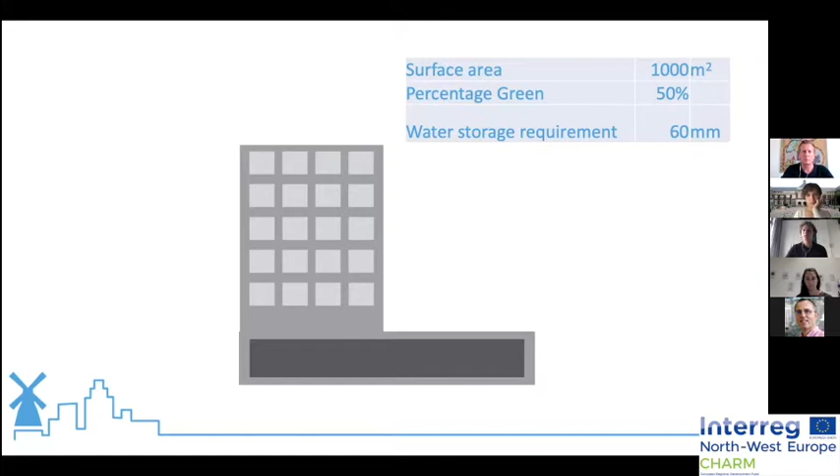Here we see a building, could be a housing corporation building with a surface area of 1,000 square meters. And there's a requirement for green of about 50% and a water storage requirement of 60 millimeters. 60 millimeters is like a really heavy shower. And you should be able to capture that on your own terrain.

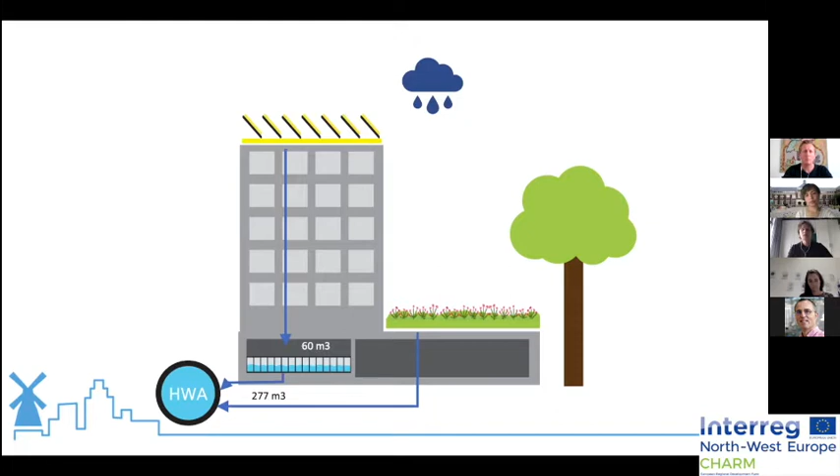So conventionally, we like to use the flat surface for solar panels, as this is a smart investment. Part of it can be a rooftop. But you have to create something to buffer your rainwater, to store it. This can be done in a basement, and you release the water at a moment when there's no pressure on the sewer system. But then there are longer periods of drought, and still you need to irrigate your green, and then you have to make use of drinking water, which is actually a waste.

So that's when the Dutch fly in with a new technology, and we invented the polder roof. How does it work? Of course, we put it on a flat roof, and the roof should be waterproof. It should be able to maintain the water for a longer period of time. Then we have the buffer crates. Here we can buffer like 70 millimeters of water, and on top of that you can put your green roof or a roof garden or your solar panels as you like.

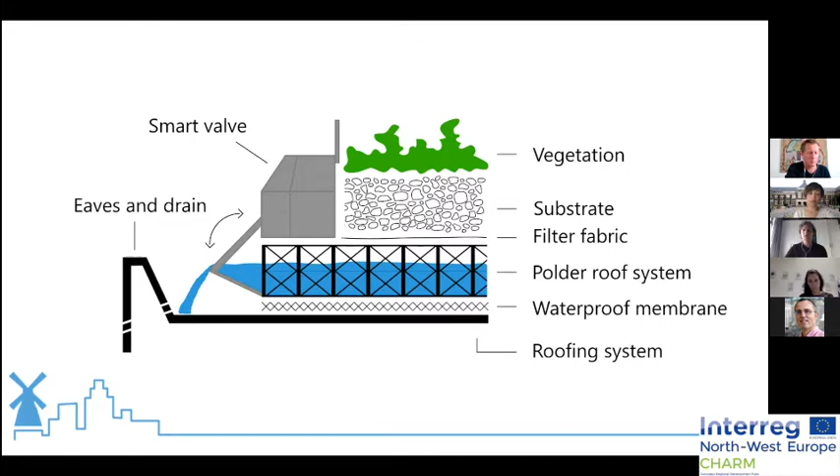But what is smart about this polder roof is actually the smart valve, which anticipates the weather forecast, which I will show you in a minute. Here the smart valve is connected to a dashboard, so from your office or from your desktop you're able to have a look at what's happening on your roof, able to manage the water level as well, or you put it on automation mode.

Back to the example, so if you put a polder roof, you're able to buffer the 60 millimeters actually on top of your roof, and in periods of drought you can use the water to garden your rooftop or irrigate your garden.

And then it anticipates on the weather forecast. So when there's still water in your polder roof, but there is rain forecasted in 2 hours, then you're able to release your water at a moment when there's no pressure on the sewer system, and you create new buffer capacity on your polder roof to capture this rainfall.

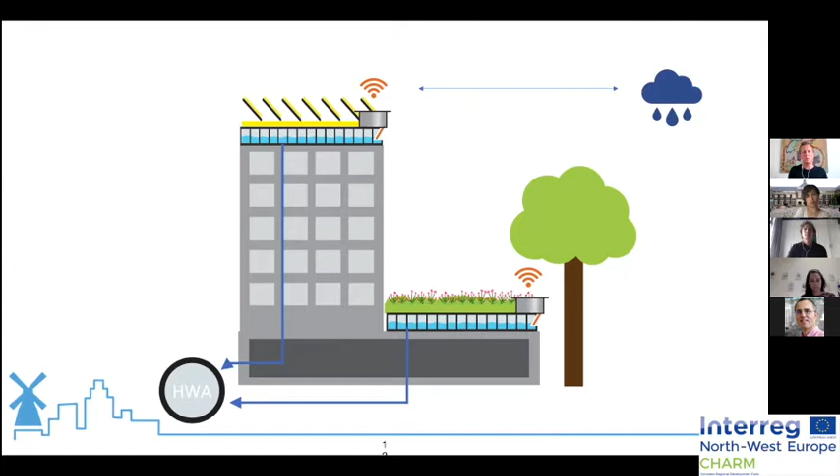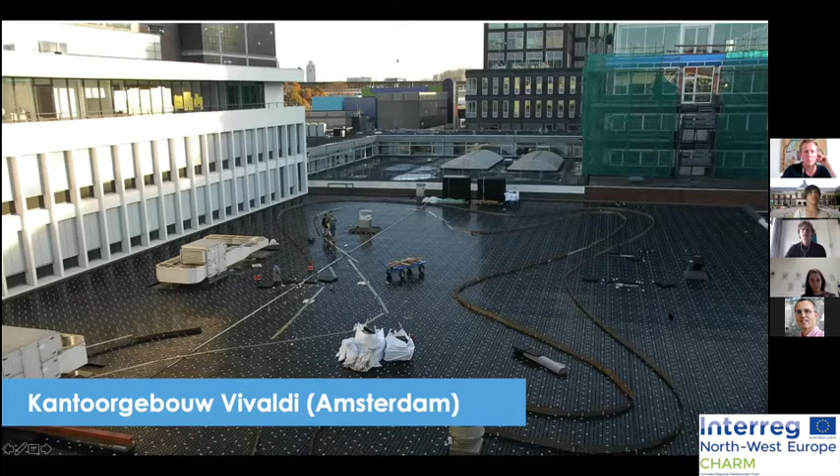I'll show you some pictures. This is a picture of an office building in Amsterdam. Here it's still under construction. So here the black is the buffer crates where you retain your water up to 70 millimeters. And here it's finished up in a really nice roof garden.

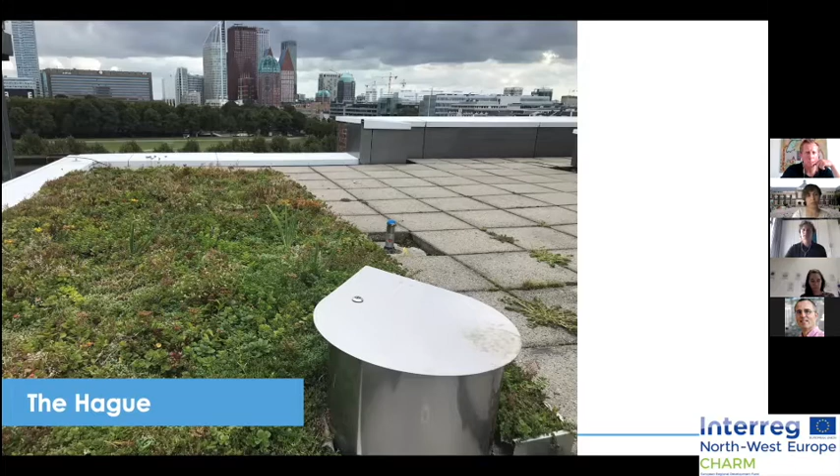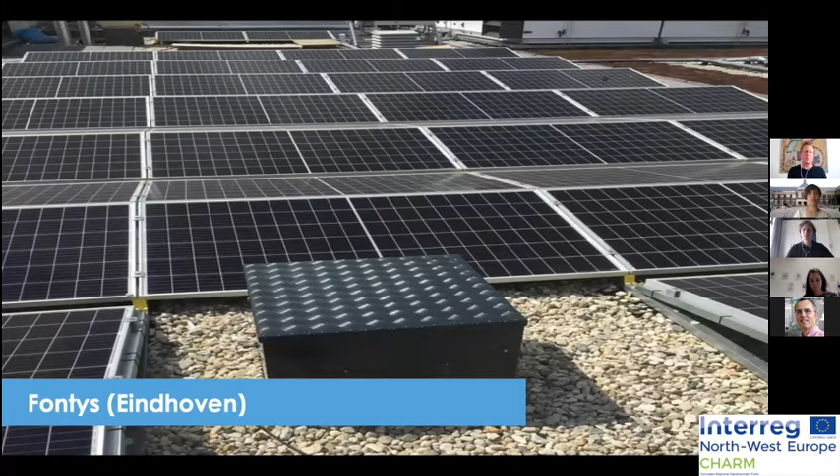I show you this picture in The Hague as we have a closer look at the smart valve. We call it actually the smart drop due to its shape. This is full of sensors and regulates the water level. Another feature, we combine the polder roof with solar panels. Research has shown that due to the cooling effect, you actually have an increase of 6% in the energy performance of your solar panels, which is of course a benefit.

Back to the city, if we talk about climate adaptation, the question is, what can we do in the city, and especially where? As 5% of the city consists of water systems, 45% is public space, but 50% is private space. So it's really important to get these private parties involved in your climate adaptation strategy. And therefore it's also important to get the social housing corporations involved, as they, in most cases, have property in the city for about 30 or 40%

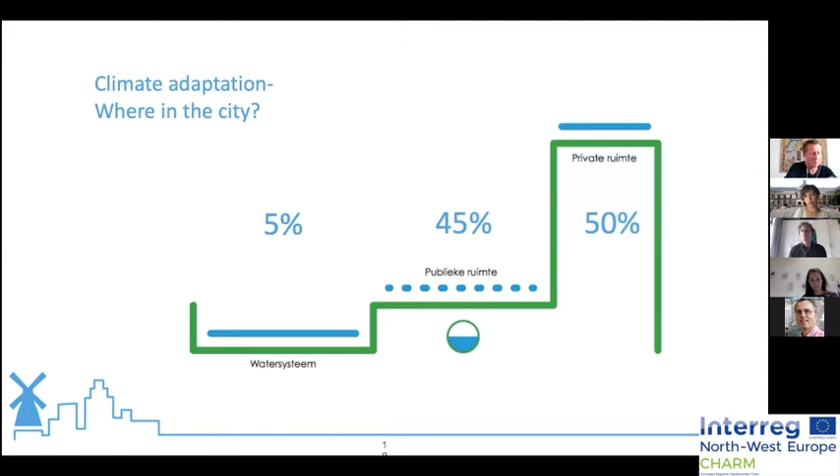even. So what we do in Amsterdam at the moment is called the RESILIO project. On the website you'll find more information, but we do research there with different universities. But more important, we work together with social housing corporations to implement 10,000 square meters of polder roofs. And with this project, the idea is to really be an example for other cities in Europe as well.

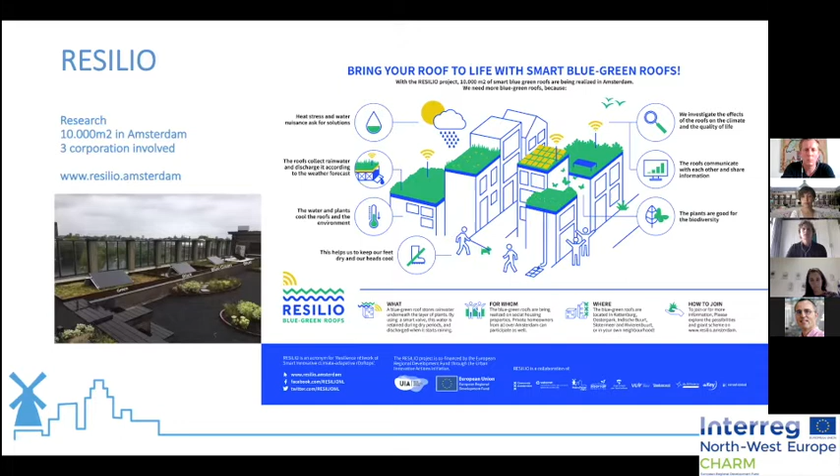So what you can say as a housing corporation towards the municipality is that, okay, we all face problems with regard to climate change, but we as a social housing corporation do have part of the solution, which is we have a lot of space which can be used, but we need your support to come along together with us and make these climate adaptation measures all together. So I think that's in a nutshell what I wanted to share.

If there's time left at the end, I can show you maybe a small video of the cooling effect, but for now, I think I'm just in time or even over time a little bit. I think we have a couple more minutes for him. If the video is not too long, we can take it. It's 30 seconds.

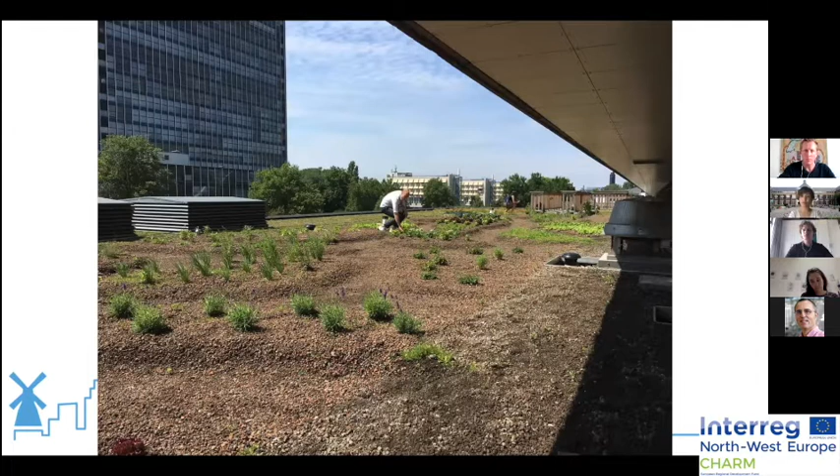Let's go for it. Okay, this is a polder roof on the TU Delft University campus, where we do urban farming. And this same roof you will see in the next video, which is an infrared video, which shows temperature differences of two similar roofs, but one is with a polder roof and the other one without.

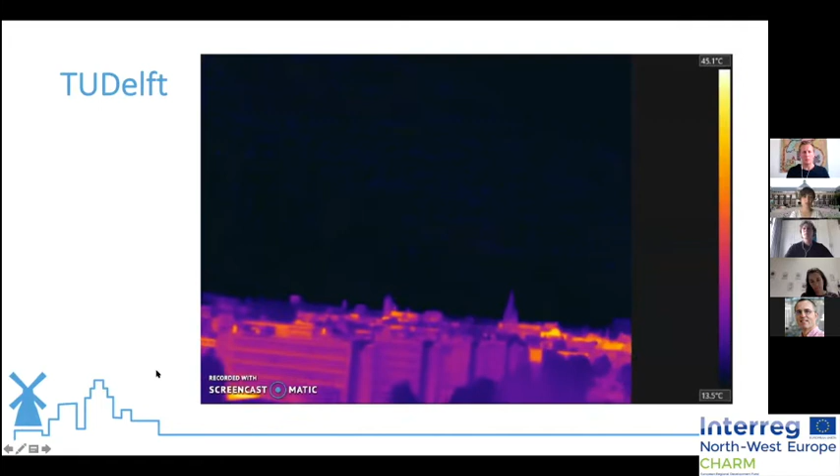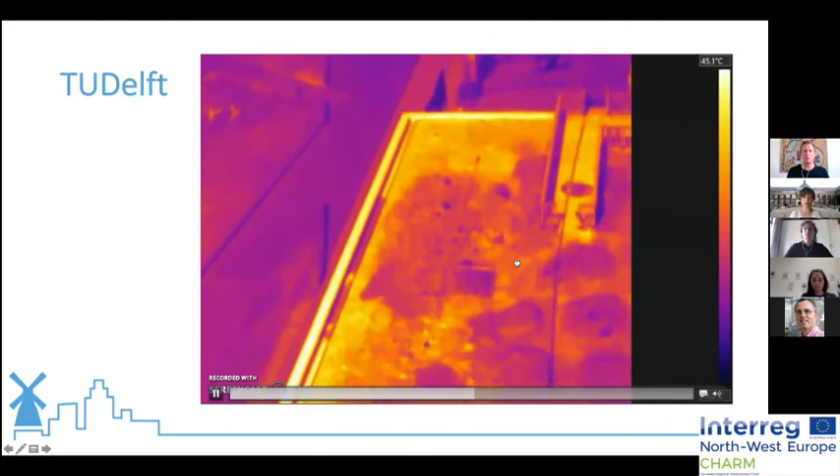So the camera in a minute goes down, and you see here, when it's really yellowish, it's pretty hot. So this roof is about 45 degrees. Wow. And the same kind of roof that we saw just now is the polder roof, which is far less hot, so to speak. So this shows pretty nicely the cooling effect of a polder roof due to its evaporation.

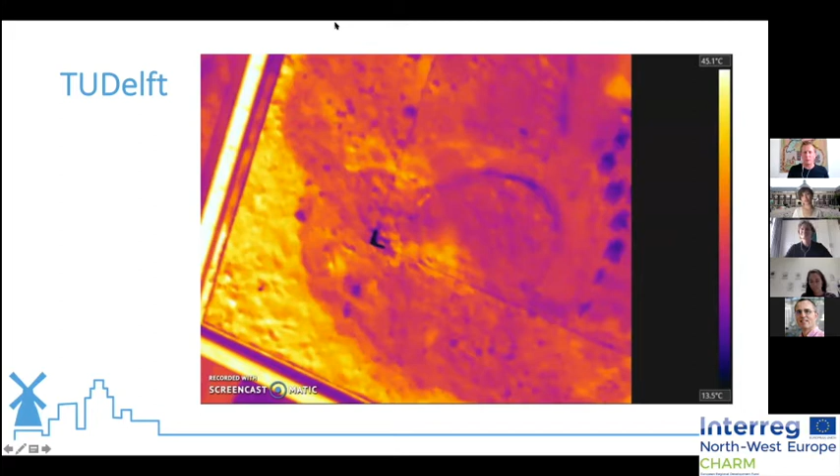Oh, that's amazing. That was also one of my questions. Is it a proven system? But you proved it already by the video. Yeah, well, with regard to the cooling effect, this is, I think, a nice proof.

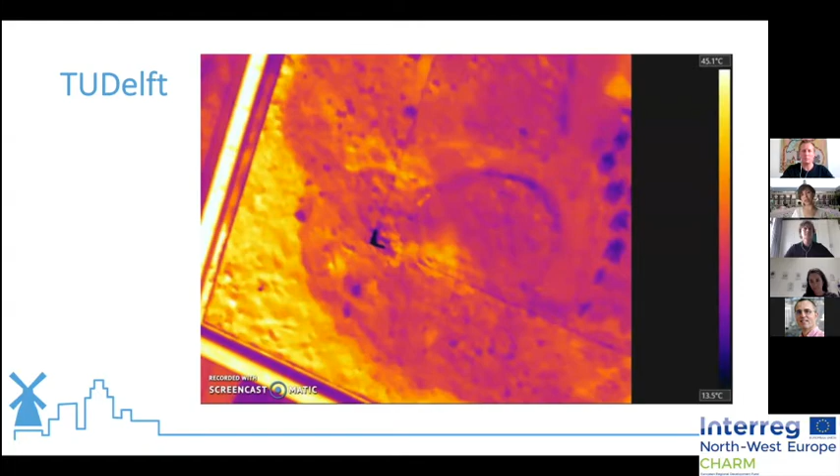Well, actually, I have two really quick questions. The first one is, do you face any kind of problems with awareness? What do you think? Awareness, are you aware of the water scarcity problem?

I think there was a lack of awareness, but this increases even here in the Netherlands, where we think we have a lot of sufficient sweet water, but we encounter longer periods of drought, especially in the east of the Netherlands. And at the same time, at city level, there is more awareness about floodings during heavy showers, and this is increasing. So I'm not so much afraid there is not enough awareness. If it's not there yet, then it will come in the short term, for sure.

And my second question is about the mill on the roof that you showed on one of the pictures. Do you put it on all roofs, or is this just a function? No, it's just a funny feature to show, like, okay, this is a Dutch company, and the windmills, actually how they work. We showed it works on small scale, but then on roofs. This was our first version. Our improved version, we call it Smart Drop. That was the one you saw in The Hague. It's easier in production, so to speak, and it's an improved version. But yeah, on request we can deliver windmills as well.

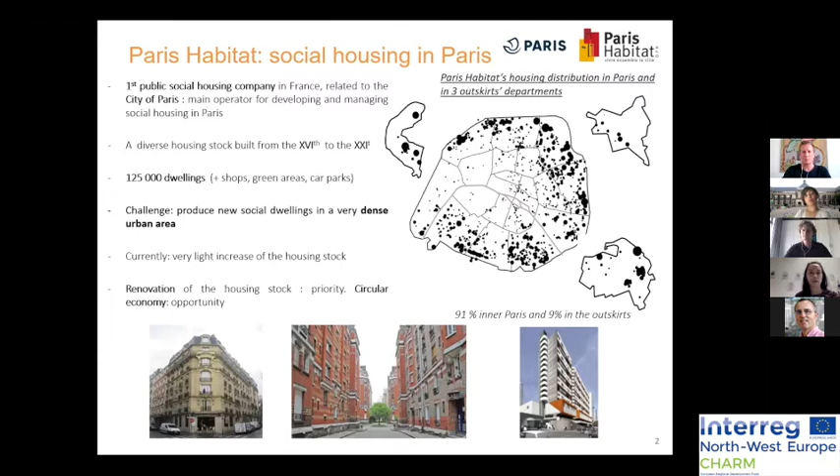So circular economy appears as a huge opportunity, as renovation involves a lot of waste and material that we can potentially reuse. We've been committed to sustainable development. Since 2005, we have our own sustainable development charter. We also commit with the city of Paris, so our operations, construction, renovation, and demolition answer to the climate plan requirements. We also signed a more ambitious charter, the Paris Climate Charter, signed in 2018. We have goals in this charter about bio-geo-based materials, but also circular economy.

And that's what we focus on, because the context is really important now. There was a law in February about circular economy, and now, for example, resource diagnosis is mandatory. So for us, it's really a priority. We already did a few experiments, for example with the city of Paris and Saint-Gobain. We gave them windows and they were experimenting how to recycle flat glass. We might also renew these experiments. We were also part of the Démoclès project by Récylum, to recycle waste from demolition. And now we're part of the CHARM project, where we really focus on reusing materials. For this, we have a few demonstration sites.

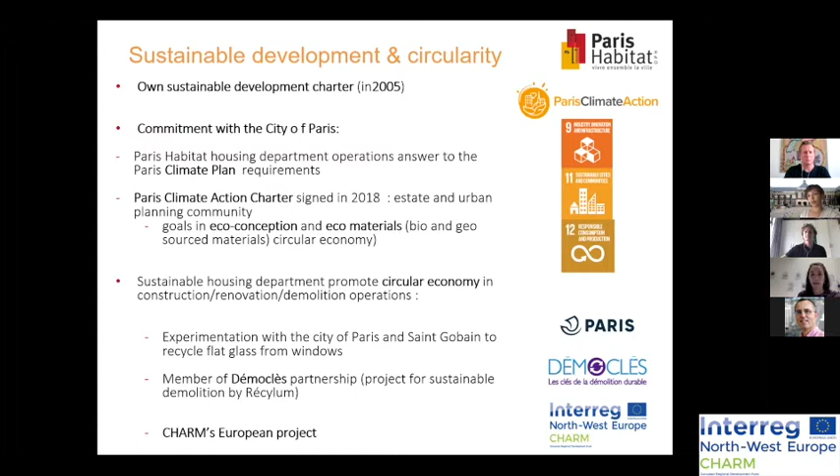Unfortunately, I cannot talk about them all, but let's say we have 5 demonstration sites. We try to have a representative panel of our housing stock. So we selected different types of buildings, different work programs. So we have typical workers' buildings with red bricks. We also have a building from the 60s, a barrack, and we also have a house.

So we have from light renovation to deep renovation to transformation. And we really wanted to have this panel to experiment a methodology, because the main goal after the CHARM project is really to systematize material reusing on every operation. So for that, I cannot talk to you about all the demonstration sites, but I want to focus on Sthrau and Caserne, which are 2 different sites.

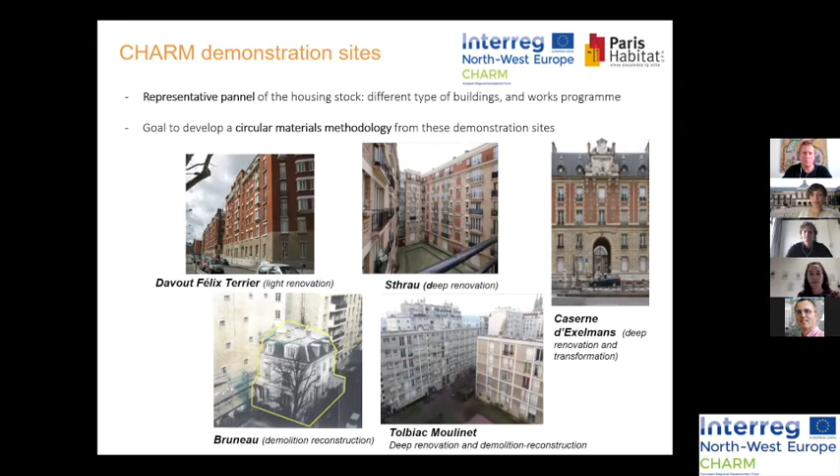One of them, Sthrau, was built in 1920. It's a typical worker building, and Caserne, a barrack, is going to be transformed into social dwellings. So 2 different sites, but we actually have the same 2 architects working on the project. So at Sthrau, we are renovating 121 dwellings, and also activity premises.

We identified the materials to reuse. For us, the resource diagnosis is really key, and the role of the architect as well, to experiment and to work with new stakeholders. So we identified the materials to be reused. You have the list here: luminaires, toilets, wash basins, windows, hot water storage, etc.

And we wanted to do an experimentation. So the architect actually worked with Paris Habitat carpenters. We have a few carpenters here, and they took wooden doors from Sthrau. On the right, it's sink furniture, and on the left, it's actually a cupboard to hide the water boiler. So this is an experimentation, and it's really interesting because it also helps us to acquire new skills within Paris Habitat, because it was made by Paris Habitat employees with the architects.

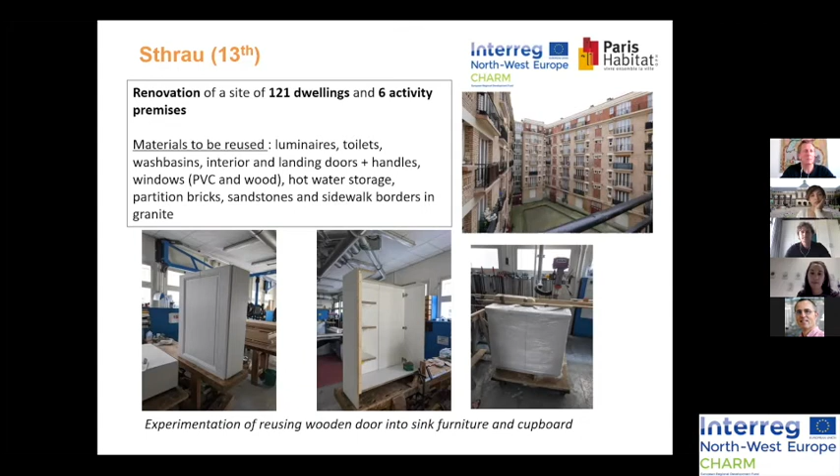And then another site, Caserne Exelmans, same architect, but it's completely different. Before it was a barrack, and then the city of Paris gave the site to Paris Habitat 2 years ago. And currently it is temporarily occupied before the work starts. The works are about renewing family dwellings and also creating specific dwellings. So we are going to create a housing and stabilization center, a transition house, a mother and child protection center, and also offices. So we did the resource diagnosis, and the works might start in a bit less than 2 years. And now the NGO Aurore is occupying the site.

And what is really interesting is that the residents are migrants, asylum seekers, and they also created this wooden hall that you can see. It's made of reused materials and hemp concrete. It was built by the residents with the reused materials in order to be easily dismountable, because when the work starts, we're going to just dismount this and renovate the site.

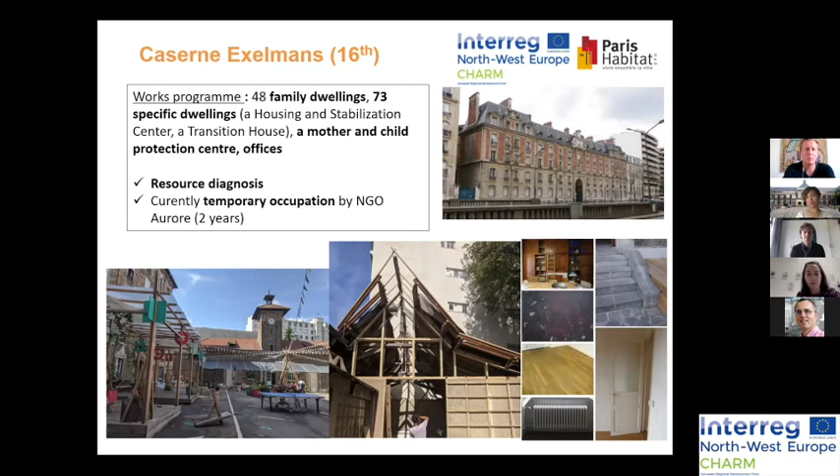So it was just to show you, with these two different sites, that material reusing is possible on different buildings, on different sites with different work programs, and at every phase of the project with different stakeholders. So feel free to ask any question. This is my last slide, but feel free to ask questions about the sites or other things.

Thank you very much, Juliette. Well, actually, I wonder how you include tenants in the processes, and what is their impact when you, for instance, reuse doors as furniture. Do they accept to have secondary materials in their homes?

It's a huge work to do, because it's true that the main obstacle for us sometimes is that they're not going to accept it because they think it's lower quality. But Xavier Brunkel, the architect on both sites, really takes a lot of time for consultation, and really sees with every family, every dwelling, because communication is key, and we have to tell them that we experiment with this and you don't have to worry, it's not going to be lower quality.

So yes, for us, the role of the architect is really key, because he's the one who's going to tell the tenants not to worry about that. And yeah. Yeah, I see.